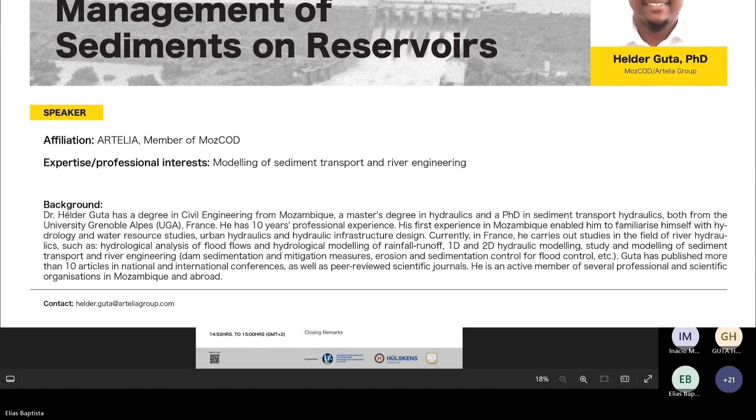Helder Guta has a degree in civil engineering from Mozambique and a master's degree in hydraulics, and a PhD in sediment transport hydraulics, both from the University Grenoble Alpes in France.

Mr. Helder has 10 years of professional experience. His first experience in Mozambique enabled him to familiarize himself with hydrology and water resource studies, urban hydraulics, and hydraulics of infrastructure design. Currently in France, he carries out studies in river hydraulics, such as hydrological analysis of flood flows, hydrological modeling of rainfall runoff in one-dimensional and two-dimensional hydraulic models, modeling of sediment transport, and river engineering related to dam sedimentation and mitigation measures, erosion, sedimentation control, and flood control.

Mr. Guta has published more than 10 articles in Mozambican and international conferences, as well as peer-reviewed scientific journals. He is an active member of several professional and scientific organizations in Mozambique and abroad.

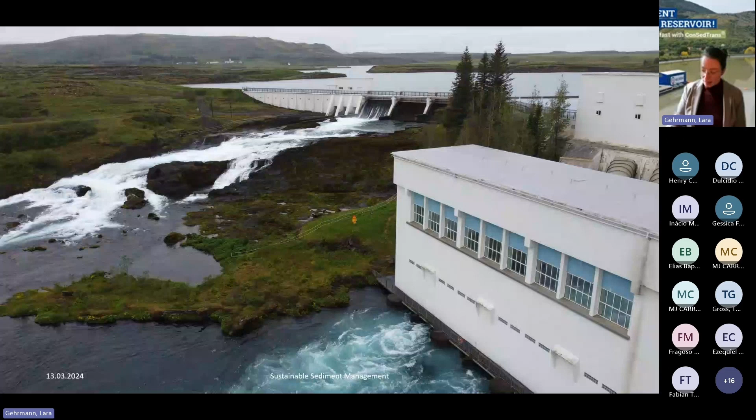When I think about water, I always like to be there. I think it's a very nice environment we are working in and dealing with. But just under the surface, there might be hidden a lot of sediments. So what we might not see at first impact are huge layers of sediment which accumulated over years, over decades. And that's a problem we need to solve in this century.

The World Bank once said the last century was made to build dams and hydropower, but the next one, the one we are living in right now, is about solving sedimentation problems.

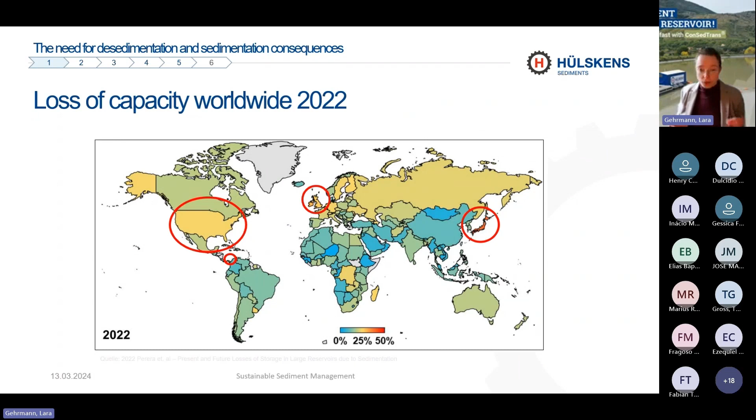To give a quick overview of how sedimentation is resulting in decreased capacity, I'll show some figures from a study published in 2023 by Perera from the UN University. We see a global overview of the status quo in 2022, with the sedimentation rate marked in colors for each country. In 2022, we had around 4 problematic countries that already had a sedimentation rate causing capacity loss of 25% of their reservoir capacity.

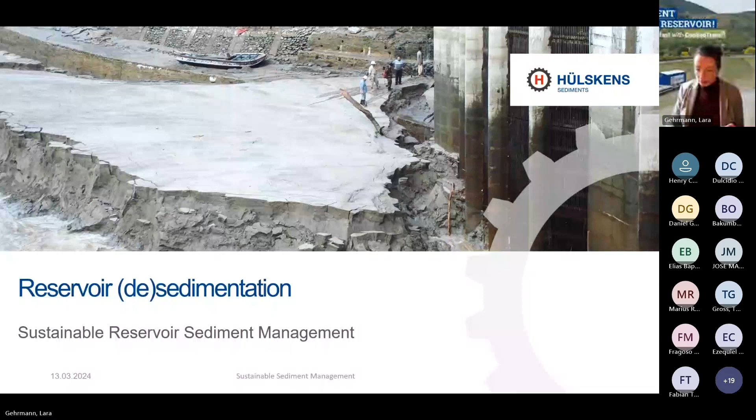Let's talk about desedimentation measures - how can we solve the sedimentation of reservoirs in a sustainable manner. To give a quick overview of what I'm talking about: when I mention the upstream water, I'm talking about the reservoir, the water area, the lake area in front of the dam. There, the water flow is almost stopped, so the sediment can just settle down.

We see thick layers of sedimentation increasing over the years. When I'm talking about the downstream water, I'm talking about the part behind the dam. Because the dam, or the reservoir, acts like a sediment trap, we have a lack of sediment in the downstream water, resulting in erosion of the bed and banks. So when we built dams in the last century, we changed the morphology of our rivers, and now we are dealing with the consequences.

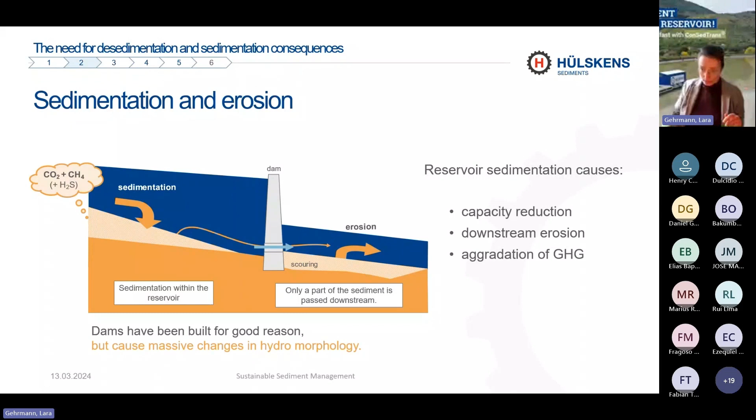So why are dams and reservoirs acting like a sediment trap? Because the flow velocity of the water is decelerated and the sediment can settle down to the bottom. The water can leak through the outlets of the dam to the downstream water, but the sediment is trapped inside the reservoir.

And because of the sediment deficit that now exists in the downstream water, the river still wants to transport sediments. We are facing erosion effects. So there is erosion of the bottom of the bed of the river and also from the sides, from the banks. This can also result in instabilities of structures.

For example, if we have erosion right behind a bridge foundation, this can result in instability because there's not enough support any longer from the bottom for the bridge foundation.

We can also get problems in front of the dam because the sediment masses, the layers, are adding another force on the dam, which was maybe not calculated in the design period.

What's also missing in the downstream water is sediment, diluted sediment, which transports nutrition. Those are used for aquatic life and also for floodplain forest outside.

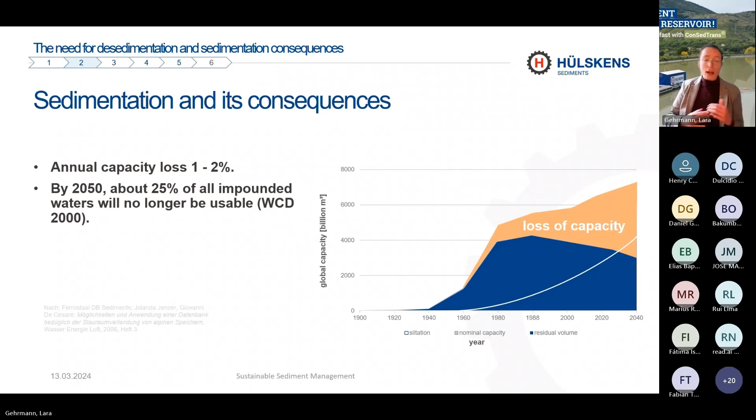The World Commission on Dams once said that by 2050, about 25% of all impounded waters will no longer be usable due to sedimentation. So that means even if we build more reservoirs, more capacity, with an annual loss of capacity from around 1 to 2%, we lose more sediment, we lose more reservoir capacity than is built new. So this results in a real loss of capacity, even though we build more reservoirs.

Here again, the quote from the World Bank: the last century was used to build reservoirs. This one will be used to solve the sediment problems.

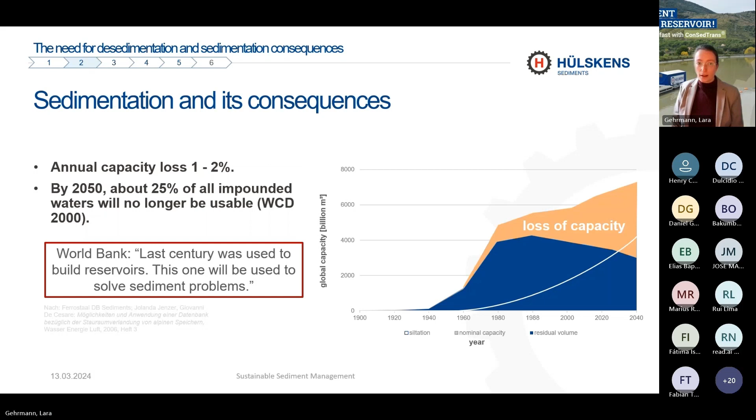But I don't want to talk longer about problems. I want to talk about solutions, about new attempts. So we focus at Hülskens, and I focus with my interest in the sediment transfer.

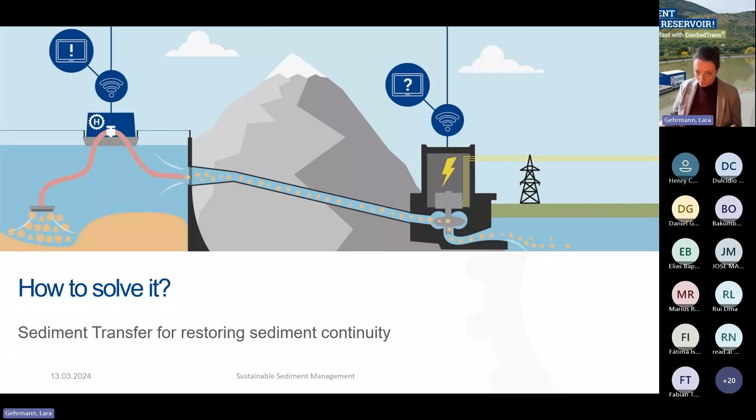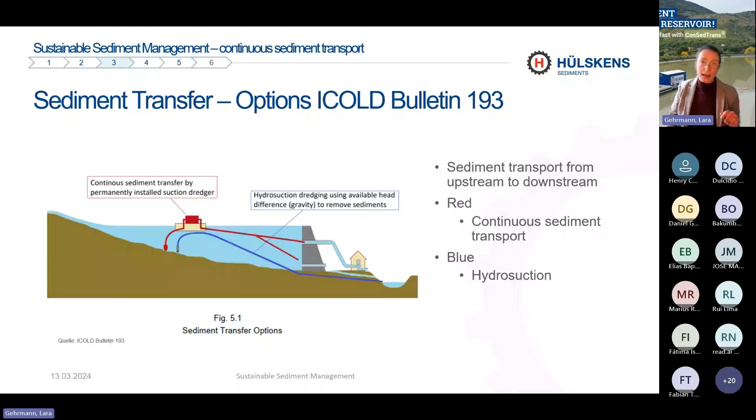What does it mean? It is, for example, explained in the ICOLD bulletin about sediment bypassing and sediment transport. And we have different options, but all are focusing on the same goal: we want to transport the sediments from upstream to downstream to restore the sediment balance inside the river.

So how does it work? We use floating platforms with an installed pump, and we use the sediments at the bottom of the lake, the bottom of the reservoir. We suck them in and transport them inside a transfer line until the drop zone.

What might be a drop zone? We have different possibilities here. First, we can put the sediments right in front of the outlets, so that by the erosive flow, the sediment is transported through the dam into the downstream water.

But we can also bypass it. So we put a bypass tube to the downstream river, and by that directly insert the sediments into the downstream flow.

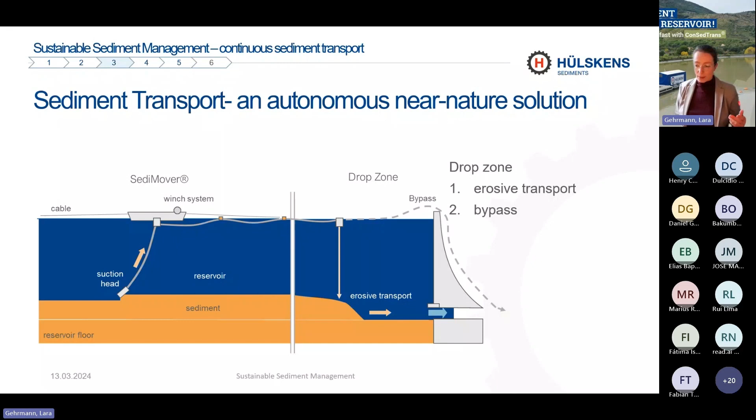But we want to focus on sustainability, and we want to focus on a natural concentration of sediments downstream. So how do we do it? We measure the sediment concentration, and we calculate and design the whole process so that we just add small, low concentrations to the downstream, so that the river can transport the sediments further.

Because what we don't want to do is add the sediment to the downstream river in a way that causes sedimentation right behind the dam. That's not the goal. The goal is to restore the sediment continuity, the sediment balance in the system.

So how do we do it? We measure what we produce, we measure what we transport, the discharge, the mass flow, the volume flow, the sediment concentrations, and then we calculate by the flow of the downstream river how much sediment we can include.

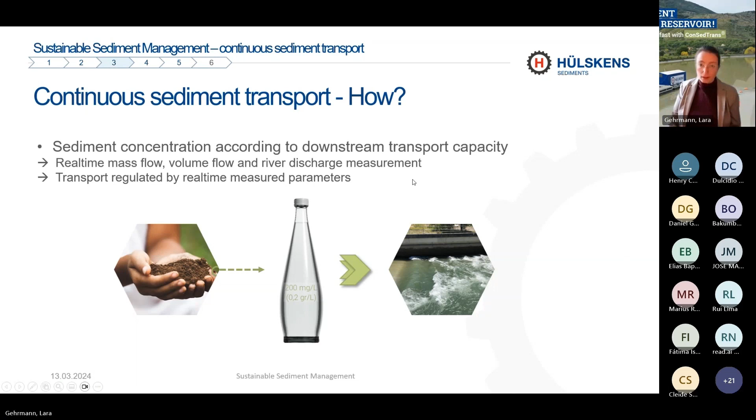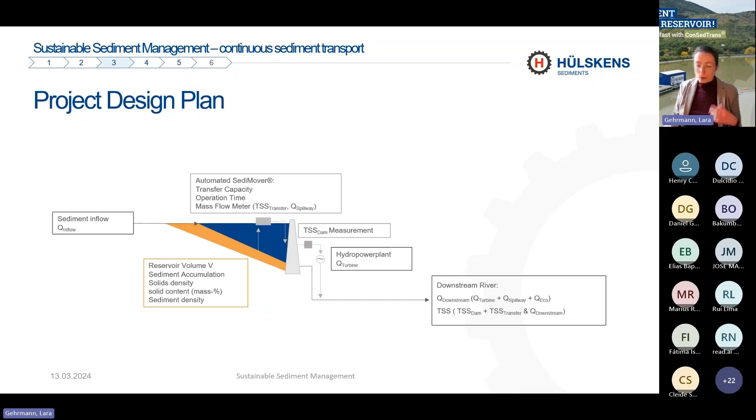Here you can see what we also have in our design phase, what we consider. So we have on one hand the sediment inflow coming into the reservoir. We know how much sediment is already accumulated inside the basin. We measure what we transport in real time, and we can also measure the concentrations in the downstream river. We have many different parameters we put into our steering, because our system is designed fully automatic. That means it can work around the clock without operators, without people close to it. It's a remote controlled system where the operator just has a surveying position.

So how do we do it? By measuring all those parameters, by knowing how much sediment we can transport, need to transport, and how much sediment the river can transport, we developed a steering, a computer program for the SediMover to work, and it's cloud-based steered. So it can work around the clock, and that's why we can transport huge masses of sediment just in low concentration, so the downstream river can always transport the sediments further away.

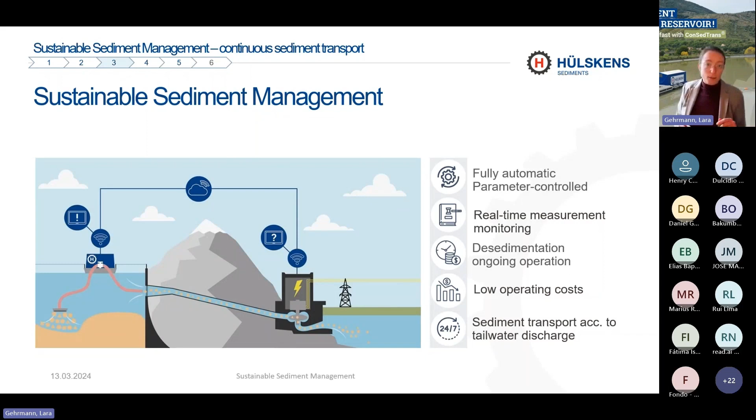In that steering, in the full automation, we include real-time measurements, hazards, weather information, river information, to have an overview of the parameters on site. And of course, if the SediMover faces a problem, clogging of the transport line, maybe an error in the system, maybe also a cut of energy supply, we are notified. And of course, we have a service which goes to the site and does maintenance on the SediMover. But in the normal case, it can work 1 week, 2 weeks, 4 weeks, and on a regular basis we have a maintenance program to check on the devices.

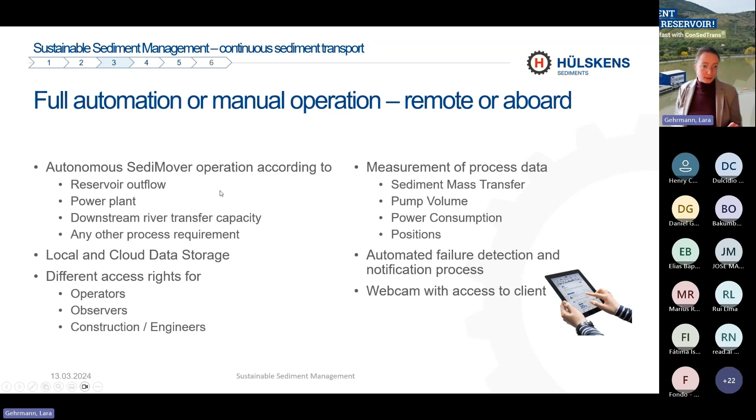What's also good is that we have cloud computing behind it, and we are very concerned about transparency. So we have the possibility to give the operator the authority to also download the data, because the better you can see it in the figures, the better decisions you can make based on the analysis. So it's really important to us to offer this data to see what is transported, how much will be transported, and how the river is doing with the sediments.

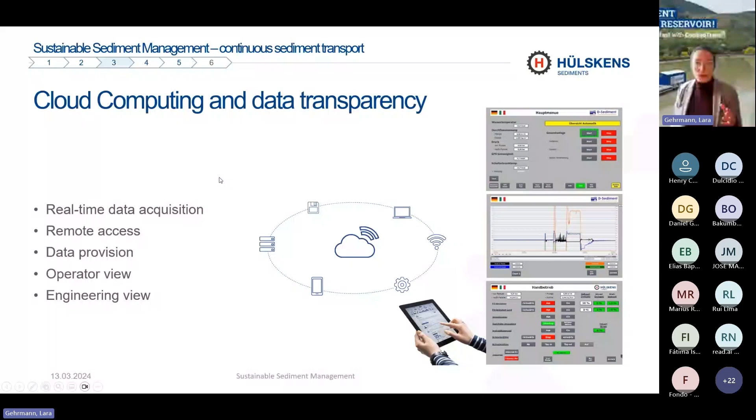I also mentioned the ICOLD bulletin we contributed to, and in my introduction it was mentioned that I'm a member of the DWA, which is a national committee here in Germany, where we contribute our knowledge about sediment transfer to guidelines which can be applied. I'm very proud to tell that the last guideline, the DWA-M 513 number 3, is about to be published soon. We got a preliminary version published in December, and now with the annotations made, it will be published, I think, in the upcoming month as a final version.

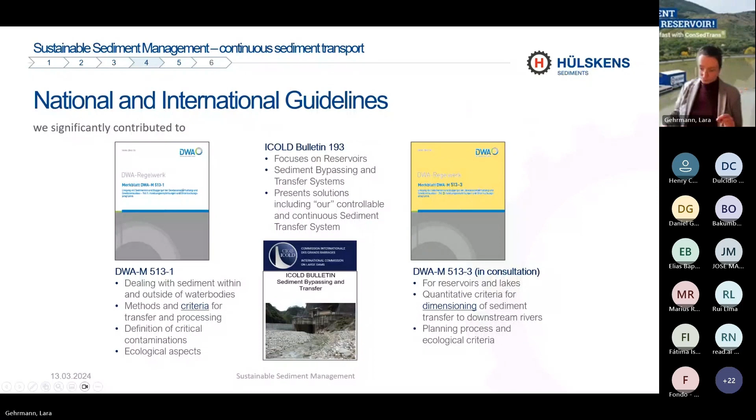I hope I could give you a small overview about how the system is working. Because of the full automation of the system, we are aware that we cannot block the full reservoir all at once, because maybe it's used in a different manner - maybe there's leisure use, ship traffic, or swimming for recreational purposes. So we work in sections, moving the sediment mover from side to side, to at the end have worked through the whole reservoir and transported all sediments from the whole area.

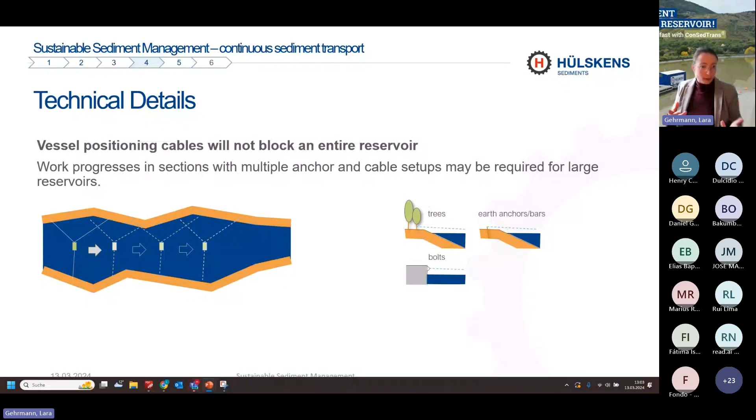We can connect it to many different things. Maybe we can use trees, maybe we can use earth anchors or bolts, because it's a very light device. It's floating, so we just have to handle forces up to 200, 300 kilograms. So it's very modular, very variable, the options we can choose.

And because we know that not every reservoir is the same - better said, every reservoir is unique - we know we have small distances up to huge distances to transport the sediments. And of course, the pump installed on board is limited in pump capacity. But that does not mean we are limited in the scalable distance we can transport the sediment, because we work with booster pumps to prolong the transfer line, to be able to work on many different kinds of reservoirs.

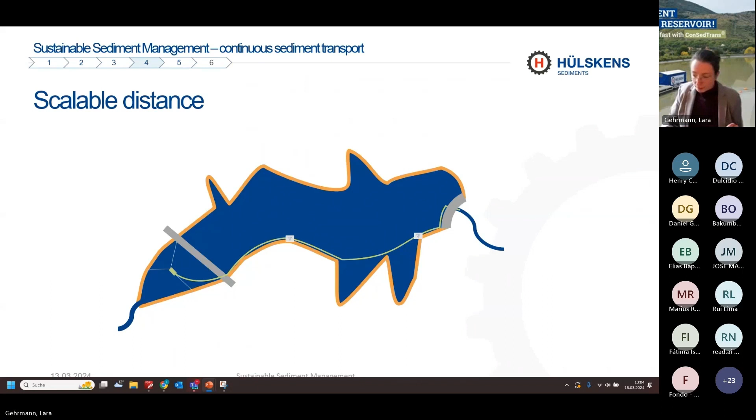That means we design our sediment movers in-house. It's possible to scale them. We focus on modular design. And the most important thing is we can focus on the specific reservoirs we have to work in, on the needs of the project, the needs of the reservoir, and also the needs of the authorities. So we can combine with our technology many different stakeholders and many different needs from them.

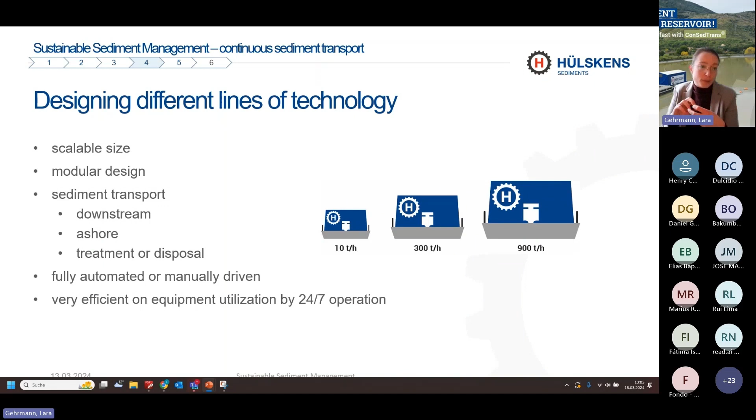It was in a recreational area close to Florence in Tuscany, and beside the beautiful nature we had there, we also had a lot of natural forces working against us. For example, we experienced some flood events with very strong currents, where the lake usually was a still standing impounded water. It was almost a big river during a flood.

So at the first flood, we were more or less surprised by it. The sediment mover, the device, was still inside the reservoir. And we could experience that it could withstand this situation. Even with strong flows, it was still solid in the middle of the lake, and we had no big issues.

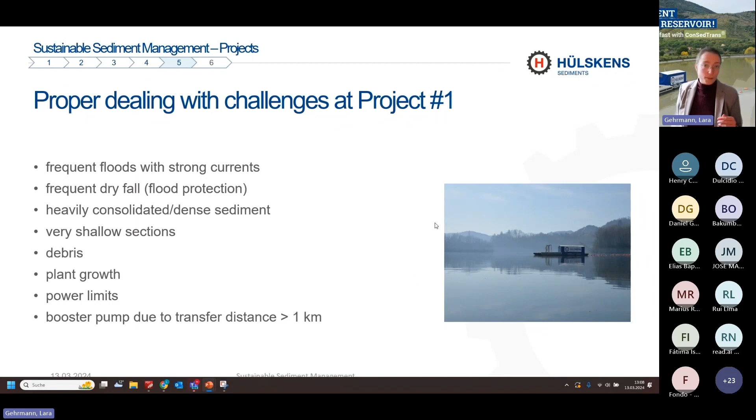After that one, I went to another project. It was also in Italy, and there we faced totally different conditions. It was an artificial channel where they had their hydropower plant, and the reservoir was at the end of an 11-kilometer long channel.

So all the sediments which entered from the reservoir were first entering the channel, then flowing until the end, until it was stopped by the impoundment, by the dam, and then again transported to the river. Here we inserted the sediments inside the turbine water, while in the first project we had a bypass system to the downstream water.

And because of the artificial manner the reservoir was constructed here, we had just fine sediments. There were almost no debris. The sediments were smaller than 1 millimeter on average, and we had steep concrete banks from the side.

Besides the conditions of the sediment and the lack of debris, we also had to be aware not to harm the concrete slabs at the site. So we protected our cutter head at the bottom with another safety gear to prevent harm from the banks. And we also experienced a dry fall event over here.

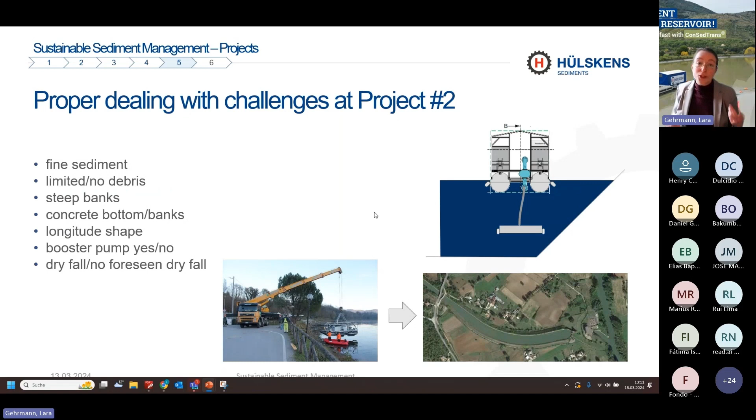We could see that was a nice day. We could see how our Sedimover was working before, how much sediment it already transported, and we could see the areas where we used the mechanical cutter and where we used the jet pump system. It was really good that we could see something which is usually hidden below the water surface.

That makes me come to an end. I want to summarize shortly what I just told you in that presentation, in that webinar. I hope that globally we put the focus now more on the sedimentation of reservoirs, and even more on how to find sustainable solutions to solve the sedimentation issue.

And then I presented to you one sustainable solution, I think, which might be one of the key technologies in the next upcoming decades: sediment transport, to restore the sediment balance, the sediment continuity inside rivers. I think it's a good approach because it can work fully automatic around the clock. It does not need operators. It's therefore a cheap system, and it's good to the environment because the sediment remains in the aquatic system and is not extracted like in other methods and measures.

Developing countries like Mozambique have some opportunities that may be greatly different from countries with more existing and aging infrastructure - Europe, United States, Japan, etc. - which have quite old dams. They really have to do a huge effort in maintaining or recovering storage capacity. Developing countries like Mozambique have more recent dams, and in many cases we have less severe sedimentation problems. So adopting good management strategies may help avoid aggravation of the sedimentation issues.

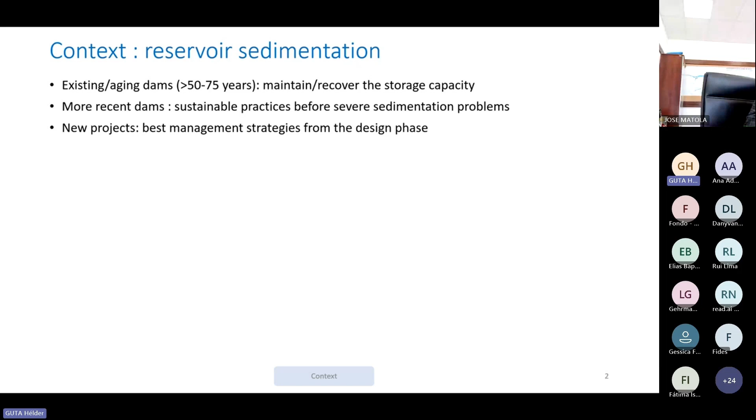But maybe most importantly, we still have many very important projects that were not developed yet. We have several in mind, and most urgently, maybe we could talk about Mphanda Nkuwa, which is a national scale project as an example. This type of issue should be thought about right from the design stage - right from the beginning, adopting some design strategies that go in the sense of better management of the sedimentation problems.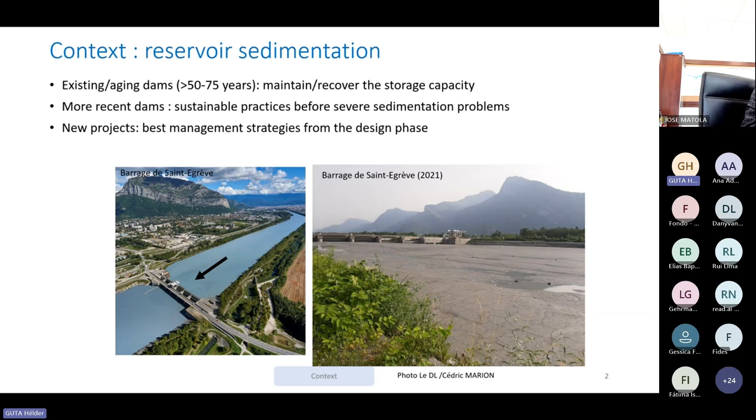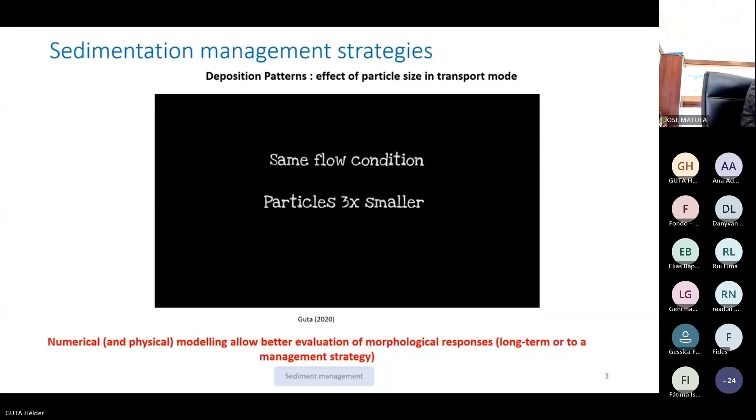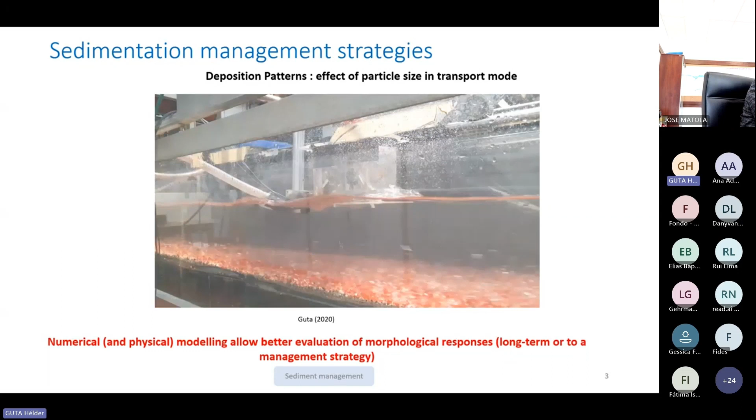Now, the deposition patterns of the sediments depend on different factors, and one of the main factors is what type of sediments are flowing into your reservoir. These are examples of videos I took during my PhD, of experiments with different particle sizes. In this video, notice it is exactly the same flow conditions but with different particle size. In one case, the first part, we have the largest sediments - they are transported near the bed, what we call bed load. Whereas when we decrease the diameter by 3 times, we have much more dispersed sediments with higher concentrations all over the depth. This is typically what we see in flood conditions, with brown water transporting a lot of fine sediments. So how it deposits depends a lot on this type of transport - bed load or suspended load, large particles or small particles.

And then other factors also play a major role, like the configuration of the dam itself - is it a narrow dam, a narrow reservoir, or a wide one? Is it a tall dam or not?

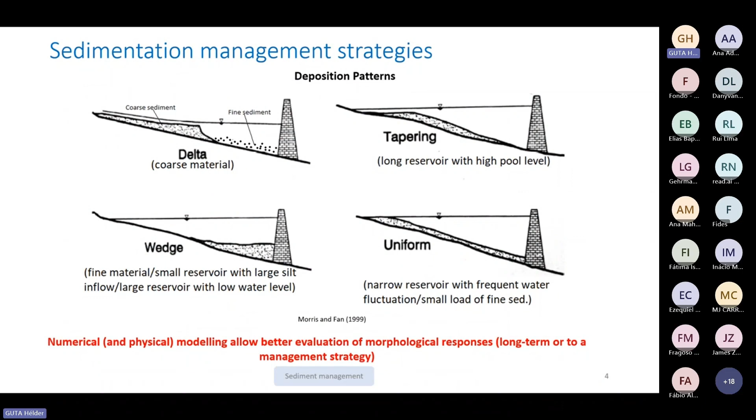This coarse and fine sand distribution may also play a major role, and it's a well documented feature. Numerical modeling of sediment transport processes can help us predict this evolution over large time scales - after 10, 20, 50 years, what may be the sedimentation pattern? These models are also important because they allow us to test which type of sediment management measures may be most adapted depending on the case.

Talking about measures, I'll mention 3 of the most important, among others, in different categories. We have mainly 3 categories of sediment management strategies. One is to reduce what comes to the sediment - we avoid erosion in the catchment, protect the surface, avoid deforestation. This helps maintain good stability of the soils and transport towards the dams.

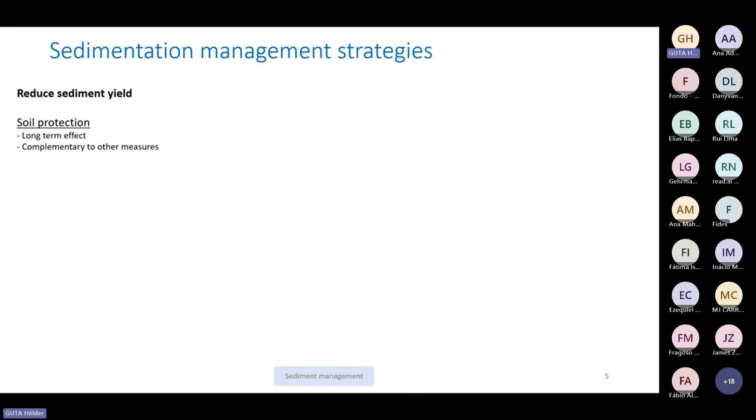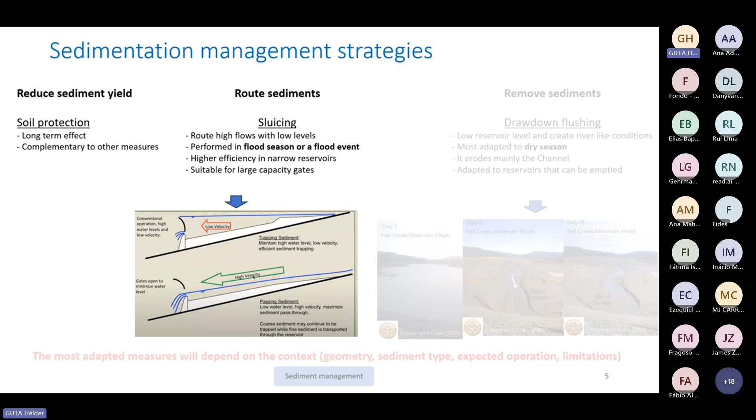The other measures deal with the way we operate dams. We have basically two similar measures that are really different in what we try to assure. One is passing sediments during flood seasons - if we keep lower levels during floods and higher velocities going through the dam, we allow sediments not to deposit. The other is drawdown flushing, in which we lower the dam mostly in the dry season in order to erode the main flow path, the original channel.

The figure on the right shows the temporal evolution after 2 days of flushing. After 8 days we start seeing the channel from which the flows will occur, eroding and moving the sediment in the channel. After 13 days, this channel becomes bigger, eroding the banks, etc. These different measures have different limitations and advantages, and we have to evaluate, according to the case, which may be more adapted.

Again, these are not the only ones - we have many others, like bypass, which Lara mentioned, a way of routing sediments either with tunnels or other methods. There's also removing sediments, a different category where we may dredge or use other mechanical strategies to remove sediment from upstream to downstream.

I just mentioned some of the measures we may think about right from the beginning when we can - right from the design stage, or even in situations where sedimentation is not very aggravated.

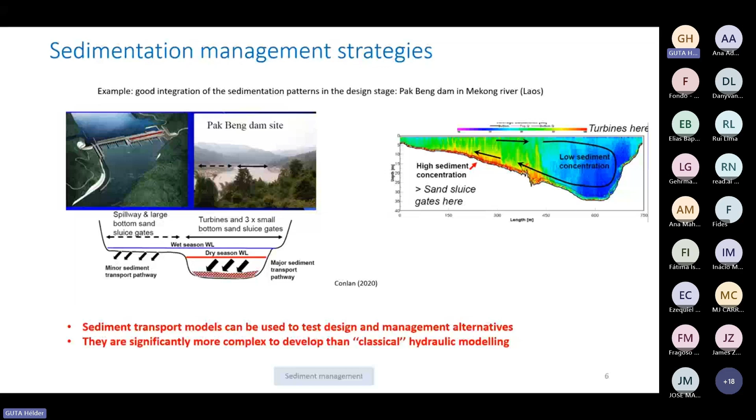One example of these strategies from the design stage is the Pak Beng Dam site on the Mekong River in Asia. The figure on the right shows how concentration is distributed. The dam doesn't exist yet, but right from the design stage we try to understand how transport occurs - where do we transport more, on the left or right side of the cross section? Where we have less sediment, that's where we want the turbines. Where we have more sediment, we want to place the gates that allow removing sediments during flushing or sluicing. So for this case, the sedimentation issue is taken really seriously.

Now I want to move to some reflections on the Mphanda Nkuwa case, which I mentioned earlier due to its importance for the country. It's a very big project, between Cahora Bassa Dam and Tete, and quite an expensive project. We are developing some numerical models to explore some questions about this project.

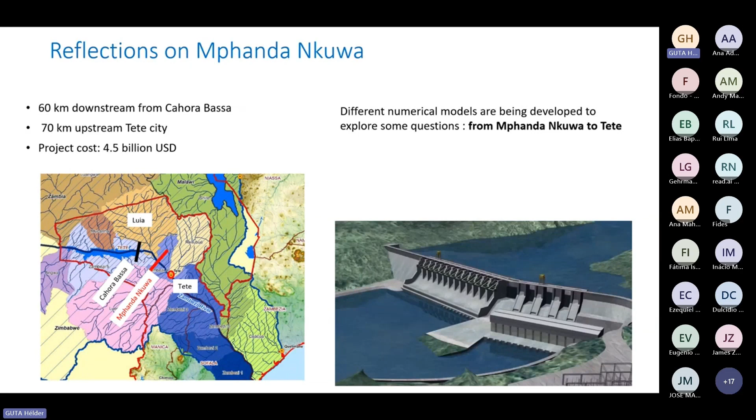A first question, and one numerical model being developed, is a 2D model for dam break analysis, in which we want to understand the propagation time in case of a failure of the dam, given that we are near one of the major urban centers of the entire country. In case of failure, what are the propagation times to reach the city, and what are the areas that will be inundated?

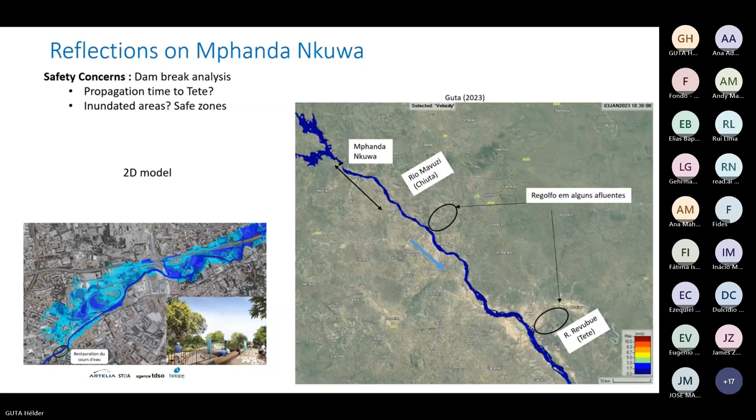But this is not the type of model to evaluate the topic we are discussing here. The second category of models we are developing regarding Mphanda Nkuwa is now related to the sedimentation issue.

What may be the issue here is that right upstream of Mphanda Nkuwa, we have the Luia River entering or discharging to the Zambezi. The Luia River is one of the main affluents of the Zambezi in Mozambique. It brings significant flow, especially during floods, but it also brings high sediment loads to the Zambezi. So it brings a lot of sand to the Zambezi.

And this sand will mostly be trapped, if no management strategies are adopted, in Mphanda Nkuwa Dam. As Lara introduced before, two issues are to be managed here.

One is the fact that without any measure, it will just continuously accumulate behind the dam. And this accumulation implies that we release clear water downstream, and the response of the river will be to erode until it reaches a new equilibrium that's compatible with its new flow and sediment conditions.

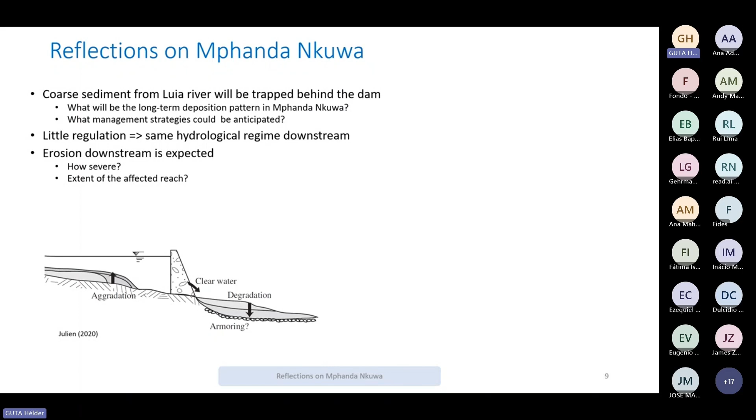So the model being developed concerning this issue is only for the downstream part, actually, because I have not had access to data in the upstream part, data which is basically bathymetry, the topography of the river in this region. I do not have it, but we had access to the bathymetric data from Mphanda Nkuwa downstream.

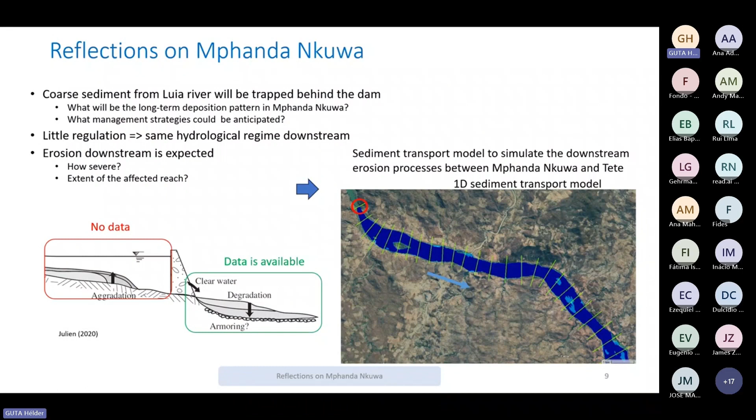So a sediment transport model is being developed to simulate the transport processes with a reduction of input from upstream due to the dam. But a sediment transport model is quite complex, so the preliminary analysis should be developed on different issues, like what is the longitudinal profile of the river in the concerned zone.

I show here in the figure about 0.02%, which gives an idea about the energy and the transport capacity in this region. And then in the figure at the bottom, it's actually the diameter of the sediments present in the Zambezi in all this region.

It's basically sand. So it confirms that indeed, and I will show another figure right after, this is the sand that will actually be reduced, which the Luia River contributes a lot to transporting towards the Zambezi. It's in the range of 0.6 millimeters.

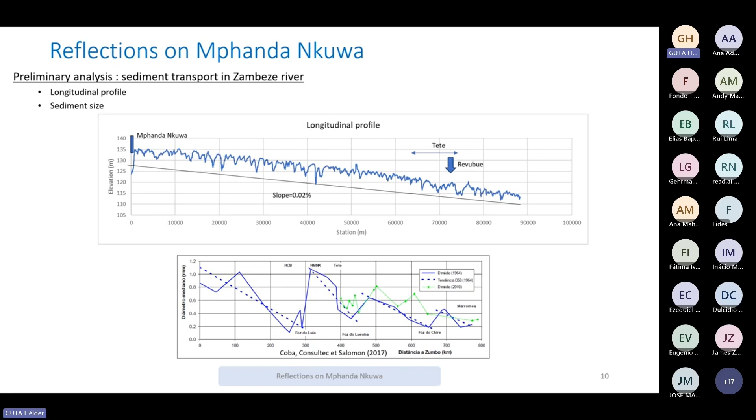After this gorge zone, we have a mobile sand zone. So that's the region that may be potentially heavily impacted by the reduction of upstream sediments.

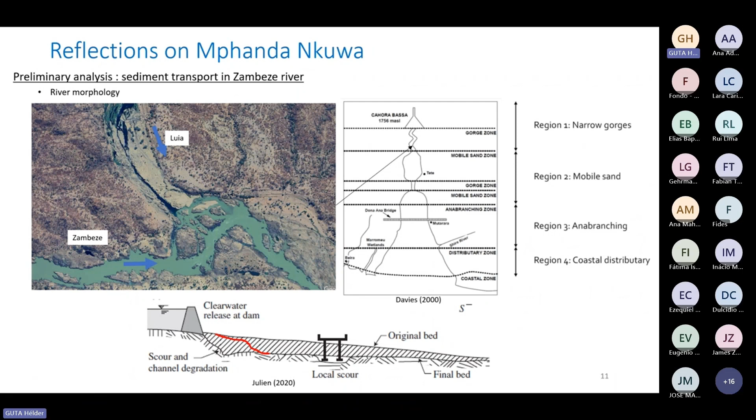As Lara also mentioned, one of the major impacts, for instance, is in terms of infrastructure. If we have severe erosion downstream of the dam, again, I show a video of the experiments I carried out during my PhD.

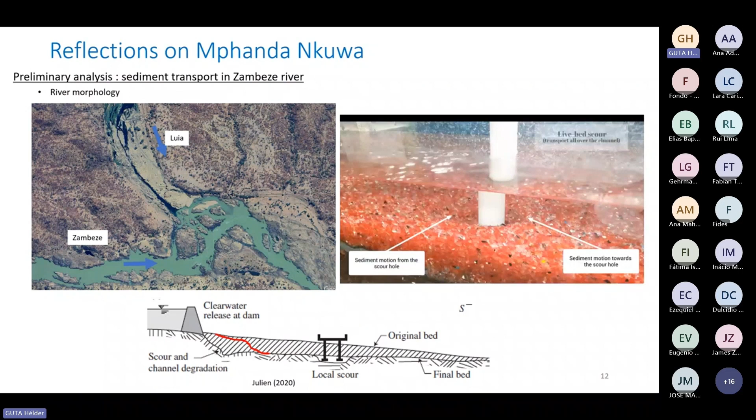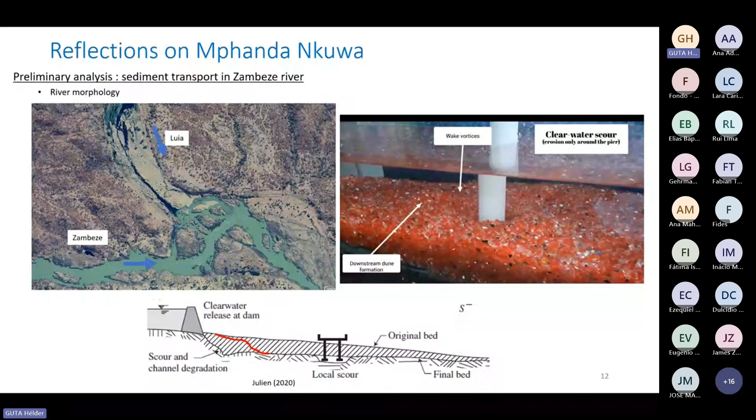This is a very simple video that shows how this scour around a cylinder, which represents a bridge pier, may occur. If we imagine the level of the entire bed in this section being reduced, the level of the scour will also be lower, and it may endanger the stability of structures when we have them downstream.

A last point in the preliminary analysis is actually the hydrology.

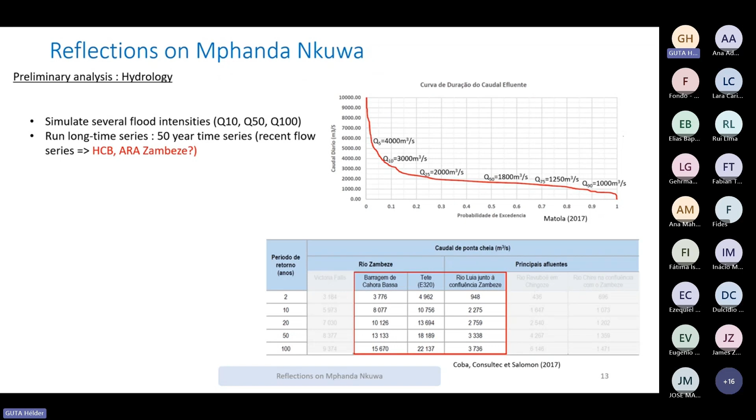This is a very early stage of the refinement and calibration of the model, so please ask me again in 5 months. The response right now I don't have yet, because the model is still being refined and calibrated.

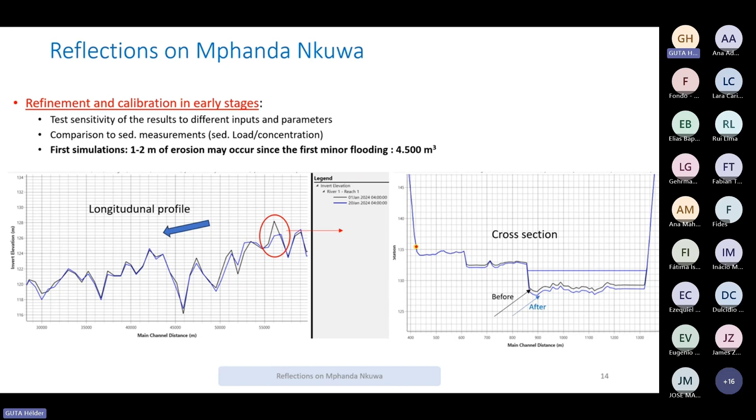To finish, monitoring is, in my view, one of the greatest challenges to properly apply sedimentation management strategies, because often we lack data. Are we able to say, in our different dams in Mozambique, what the rate of sedimentation is in the different reservoirs? Without collecting data, it is difficult to answer this question.

What data do we need? Well, we need bathymetric surveys that may be really detailed, or just some cross sections. What sediments are present in the reservoir and even in the river? Can we measure the sediment transport itself? Often it will be sediment concentration.

Also, it would be interesting for the case of Mphanda Nkuwa, if data is available, to run these sedimentation models for the dam itself. This was not possible in the same way as the model downstream, as no data is available on the bathymetry or even cross sections. If someone knows about available data, I will be happy to take this data and start building the models for the Mphanda Nkuwa dam itself.

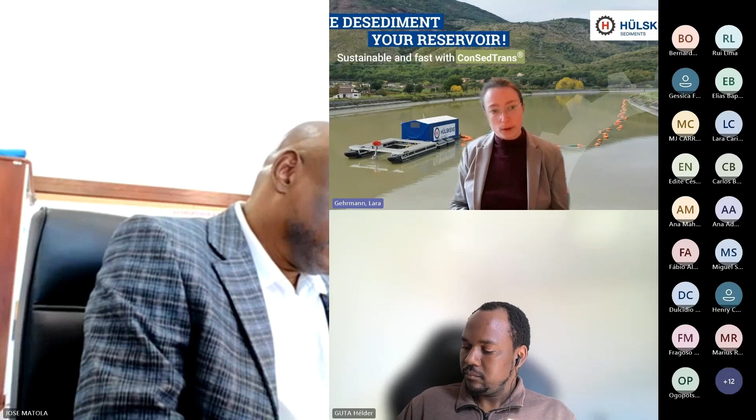Maybe you can talk about the cost of this kind of project, using your experience from the last projects. How is the cost? We usually calculate prices per cubic meter. For sediment transfer, it is between 10 to 30 euros per cubic meter, depending on the situation and the sediment volume. The more volume you have, the cheaper the per cubic meter price. And of course it depends on the sediment density, the compactness of the sediment, and whether it's contaminated or not. So there are many factors, but in my experience it was always between 10 to 30 euros per cubic meter. For cubic meter of water or cubic meter of sediment? Removed sediment - cubic meter of removed sediment.